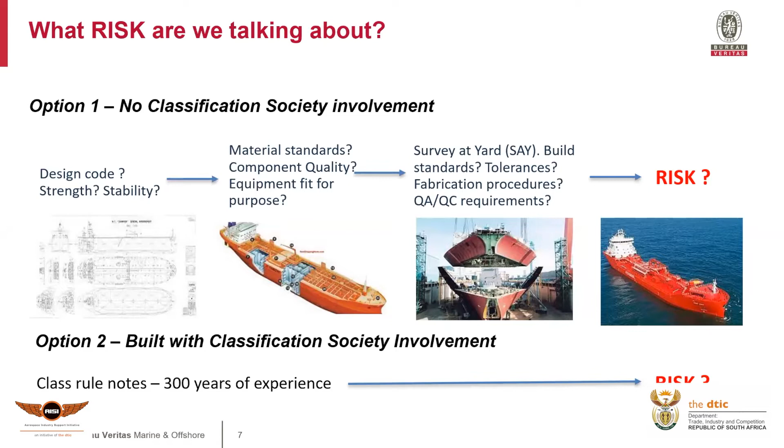So as time went by, a group of class societies got together, 12 of them, and in 1968 they formed an organization called IACS, which stands for the International Association of Classification Societies.

Together, IACS classes more than 90% of the world's shipping tonnage, so definitely the biggest body in classification.

IACS is dedicated to safe ships and clean seas, and most international administrations use IACS member rules and regulations as a basis for their fleet rules and for international statutory regulations. Because IACS is such a big technical voice in shipping, it plays an active part in suggestions and discussions with the IMO and assists with the development of international conventions.

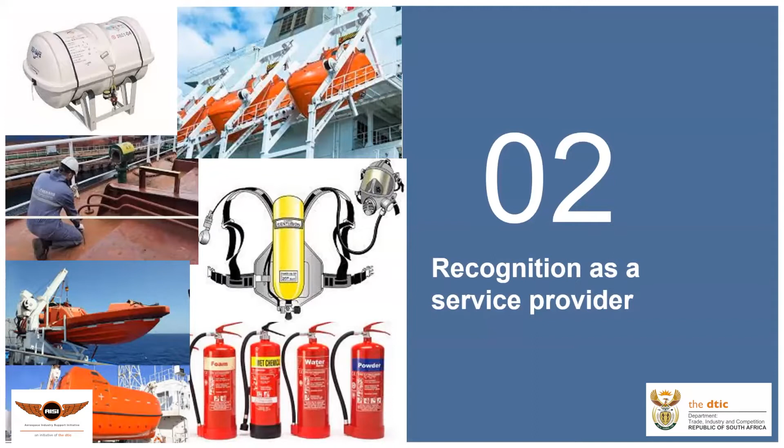Okay, moving on to recognition as a service provider. So typically there's lots of people involved with shipping.

You've got port authorities, financial institutions, class societies, flag state authorities, agents, insurance providers, the IMO, and then we also have service providers for class related services, service providers for statutory services, and OEM and product suppliers. So lots of different people involved.

For the sake of this presentation, we're interested in service providers for class, service providers for statutory services, and OEM and product suppliers.

For service providers, we provide a recognition scheme. The purpose of the scheme is to create a network of independent people available all over the world that are capable of providing specialized services.

There's been lots of discussion about this in the past. What are the benefits? One benefit is you have people specialized in a particular field, with specialized equipment and specialized procedures doing the work. They're independent from class, so the owner has a choice of who he wants to use.

It's supposed to be neutral between the owner and class, as neither one acts as the instructor, nor has a direct say about what the independent person is doing. It also provides competitive pricing models, because you've got different people competing, so you don't have price fixing - you've got free market competition. So there are lots of benefits for class and owners to use independent people for class and statutory services.

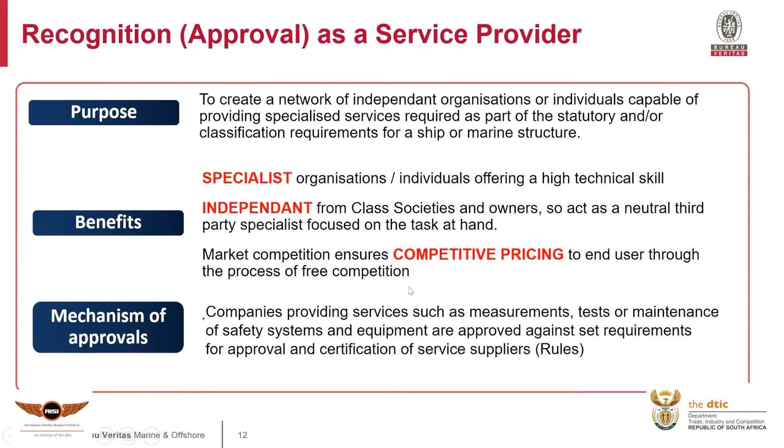How do we approve these people? Companies providing services such as measurements, tests, or other inspections are approved against a set of rule requirements. So again, we have rules coming in. Approval of service providers covers lots of different categories and lots of different services.

There are two main categories: statutory services on the left, and class and/or statutory services on the right. Statutory services tend to be related to safety items and items that deal with regulatory approvals as well.

So we have items like life jackets, life rafts, radio equipment, self-contained breathing apparatus, VDR, sound level and public address systems - mainly for passenger vessels. Same thing with low location lighting, examination of rescue boats, AIS equipment, and ballast water management systems, which is a new development based on the new ballast water convention, where we now have companies accredited to test ballast water discharge during the commissioning process.

For class, we do approval of companies that perform thickness measurements. Thickness measurement is quite an important part of classification, as it gives us an idea of the condition of the ship's shell plating and internal structure.

We do dive surveys, so we approve people for doing dive surveys. We do inspection of firefighting equipment, tightness testing of cargo hatches, noise level measurements, examination of ro-ro doors, coating inspections, gas carrier membrane inspections, and remote inspection techniques.

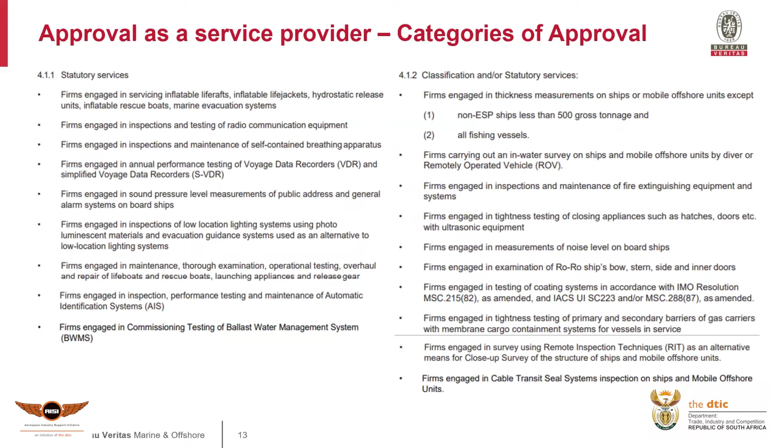So we do that internally - we check that we've got all those in place before we approach class. Once we're happy that we've got all those items in place, we approach class and make an official request for recognition as a service provider. Class will then do an initial document review - they'll check all your paperwork. Then they'll do an audit plan, transmit that to you, and we attend for an audit.

During the audit, we follow the audit triangle. We check that you've got the procedures required to do the job, that you've got the equipment required, and that you've got the people to operate the equipment and follow the procedures to get the job done. If all of those are in place, we do a practical demonstration to prove that your company can actually function, that it's not just a paper exercise. And then finally, if everything's okay, we give you approval as a recognized service provider.

Everybody's still alive out there. I haven't bored you all to death.

Still good, Mark. All good.

Okay, so as part of this internal review and assessment of capabilities, you obviously need to know a little bit of information. So where do you find this information that you need to do this internal audit, and figure out if you actually meet all the requirements?

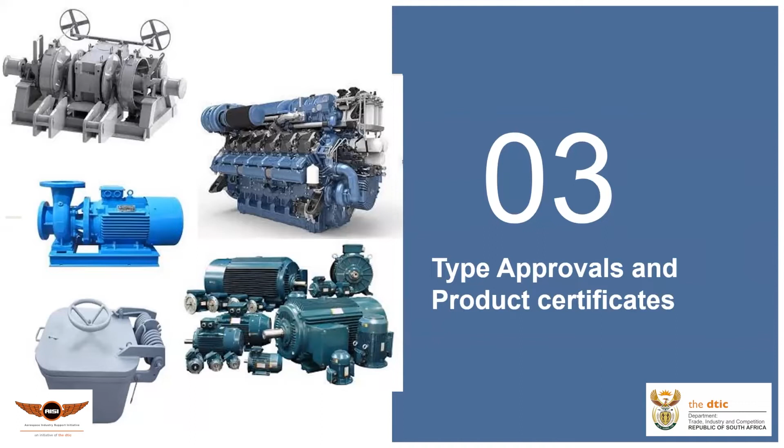So we have engines, we've got pumps, we've got hatch covers, quite a wide range of products. If you look at a typical ship, there's a lot of different products that go into it. You've got raw materials and hull components, refrigeration systems, electrical systems, propulsion systems, hull outfittings - a huge amount of material. People, I don't think, realize how many different components actually get fitted into a ship.

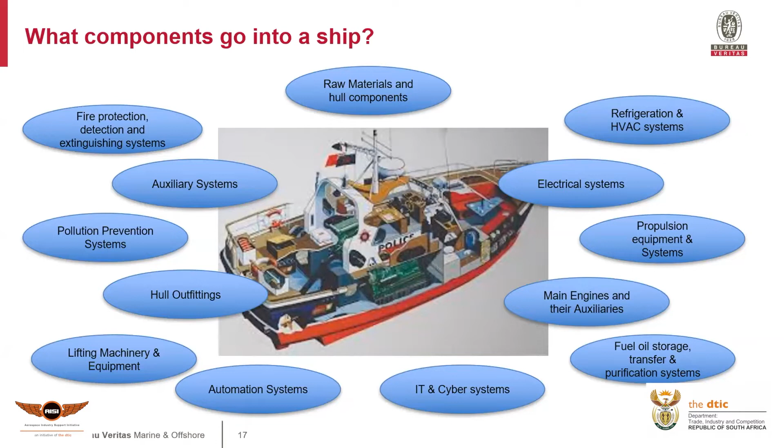And we also have our famous rule notes. If you remember, classification refers to the process of verification against a set of requirements, standards, or rules. We have many different ship types, and so we have many different rules. We've got, for example, rules for the classification of steel ships. There was a message in the chat earlier about yachts, so that would be Rule Note NR 500, which provides rules for the classification and certification of yachts. So a whole lot of different rule sets.

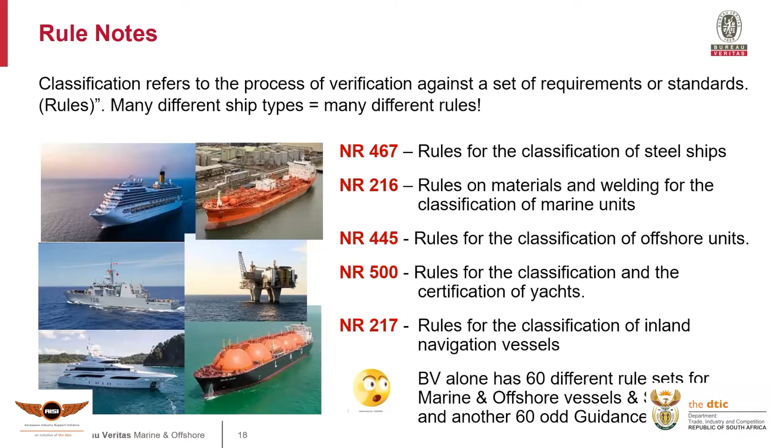We've got rules for the classification of offshore units, and BV alone has 60 different rule sets for marine and offshore vessels and structures, and another 60 odd guidance notes. So lots of paperwork - so many different components that go into the construction of a vessel or marine structure, and many different rules for many different ships, boats, and marine structures.

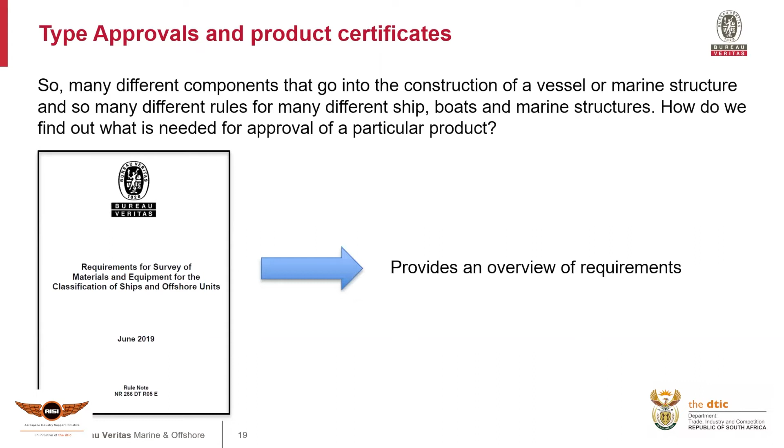How do we find out what is needed for approval of a particular product? For Bureau Veritas, we have a rule note called NR266, requirements for survey of materials and equipment for the classification of ships and offshore units. So what BV have done is provide a roadmap or simplified version of all our rule notes - everything gets put into one little book so you can read it and then get referred to the various other rule notes. It just provides an overview of general requirements for material certification.

When you open the book and read it, you'll have a lot of pages like this - we'll just run through it quickly. This is for raw materials and components for a hull. You have a description of the item, and then steps for product certification. On the right, in terms of remarks, you can see little notes that refer you to the correct rule note that you would then go and see to get detailed information.

If you look at the approval process, just a few key points on how it actually works. It'll start off with a design assessment or approval. So you would generate your design and send it off to class for review. Class will look at your design and review it against the applicable rule notes.

Same thing with material - you would choose your material, send your material selection to class, and class will then look at the material selection and review it against the applicable rule notes. If both of those meet rule requirements, the design assessment or design approval section of the approval is passed.

Then we do the second phase, which we call survey at works, which is examination of your prototype. We do physical examination and testing to check that it meets the design requirements or theoretical expected requirements. If visually and quantitatively it meets the design assessment documentation, and testing meets the testing requirements, the product is awarded a type approval certificate and/or a product certificate, depending on the category of approval.

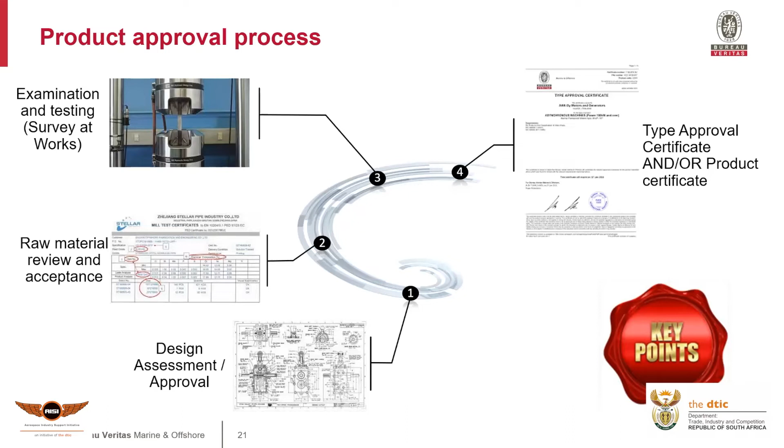We have different categories of approval at BV - there are 3 different categories, and each category has a different level of BV involvement. IBV products are products that we need to certify individually - for example, steel plating on a hull - those are done per batch produced, and we get a product certificate for those.

We have HBV products, which are mass-produced products - this example, we've used fuses. They're basically similar products produced in large volumes, needing to meet requirements, but provided the manufacturing technique is maintained, the product that comes out of the production line is going to be the same.

And then lastly, we've got DBV products, which are products like cable ties, where we have a design assessment, but we don't really get involved in the verification of the production. And you'll see that as the product risk, or the risk of the product to the vessel, reduces, so does our involvement.

A little bit more detail. Sorry, wait, just hang on, Mark. I'm trying to mute somebody, not muted. Just trying to see who's speaking. Never mind, there we go.

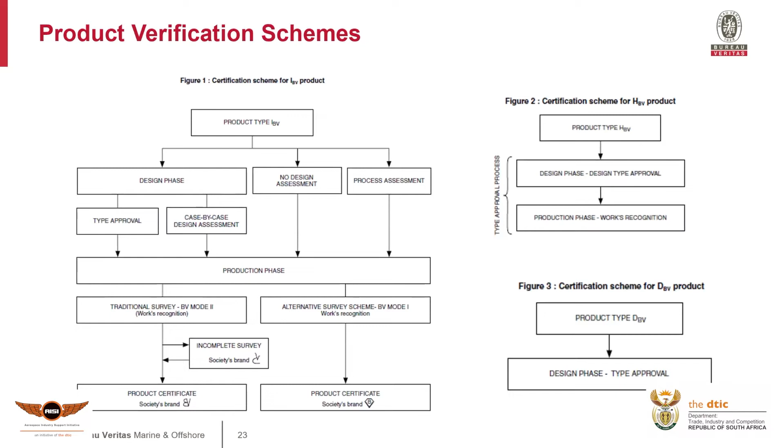So product approval. If we're going to decide that we've got a product that we want to have approved by class, how do we go about getting it approved? First step, again similar to the original discussion about service providers, is to do a review and an opportunity analysis. What opportunities are available to me? Is there a local shipyard that needs certain components? Are they importing those components? Can I make them? Can I approach them to make them locally on their behalf? Find a market.

Once you have a product and you've decided what you want to manufacture, do a rule review to assess the requirements, or what you need to actually be achieving. Then do an assessment of your capabilities, or your capability to actually achieve the standard that's required. So effectively, do you have the necessary skills, process, material to meet the rule requirement? Check and make sure before you start the whole process that you can actually achieve what you're hoping to achieve.

If your internal exercise says yes, you then approach class for product approval. First step in this is the initial review and contractual agreement. This is the first and the most important step, because it sets the tone for the rest of the approval process. It's very important at this stage.

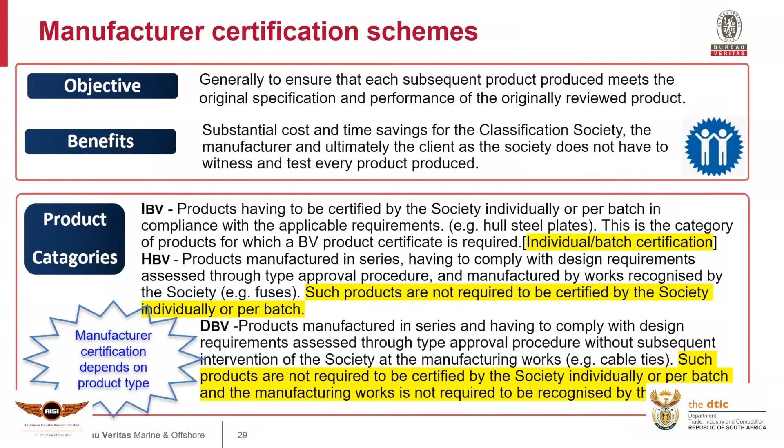This is a summary of what we just spoke about: 3 categories, IBV, HBV, DBV. Design assessment, which is the first phase, and we can call that type approval. You'll notice the second item, case by case—often people have a product manufactured as a one-off. One thing to note is that everything goes through a design assessment. You can see right down to DBV, everything is checked against the rules in terms of the design.

For production survey, for IBV we have mode 1 or mode 2. And for HBV, we have mode 2, and then DBV is not required.

So what's this mode 1, mode 2 business all about? We offer 2 different types of approvals for manufacturers. Mode 2 is works recognition, generally used for IBV or HBV products, and it's linked to a specific facility. So we review and check a specific production facility. You might have 7 different factories all making the same product, but we would have to attend each factory to have all 7 approved. If you only want to make BV products in one factory, we'd attend that one factory. So it's linked to a specific facility, and it requires an ISO 9001 aligned quality management system. So you need a management system, and it needs to be aligned to ISO 9001.

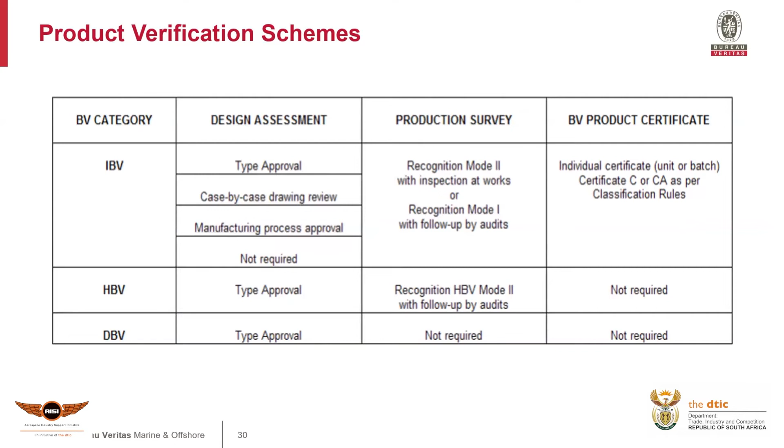Some manufacturers can apply for mode 1. If we go back one screen, we'll see under production survey for IBV, we've got recognition mode 2 with inspection at works. So although you have this mode 2 certification, we still have to attend from time to time. Or you can go for mode 1 with follow-up audits.

So IBV products can apply for mode 1 recognition, subject to agreement with BV. Again, linked to specific facilities and mandatory to have an ISO 9001 certificate.

Mode 1 is an agreed alternative survey scheme that allows the manufacturer to carry out the required tests and examinations partly or totally without the attendance of the surveyor when a society certificate is required. It's quite a mouthful, but basically, normally for IBV products, BV has to attend for every product.

If you are lucky enough to get a mode 1, the society delegates the authority to the quality management system of the manufacturer. So you can apply for mode 1, do your own testing according to the BV rule note, without BV having to be in attendance. Saves a lot of time and money.

We've got a question: what is the typical cost of type approval accreditation? It's a how-long-is-a-piece-of-string question, because it depends on the product you're trying to approve and the complexity of approval. Sorry, I can't give an accurate answer - you can have an engine that costs X and a fuse that costs Y.

The easiest thing is to send me an email. What we normally do is provide a comprehensive quote and proposal for any product you're considering having approved - we'll provide a cost, a time frame, and a set of rule requirements that will need to be met.

And from Christian - you said, do you guys work together with SANS? Who's that question directed to? Mark, let's direct it towards BV. Does BV have any direct relationship with SANS? No, we don't.

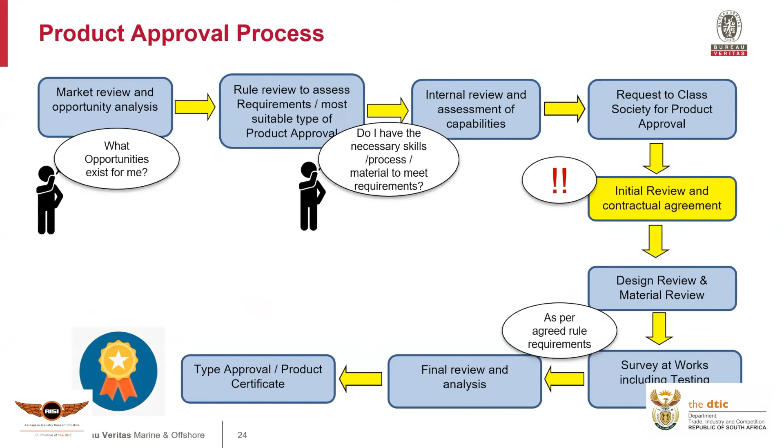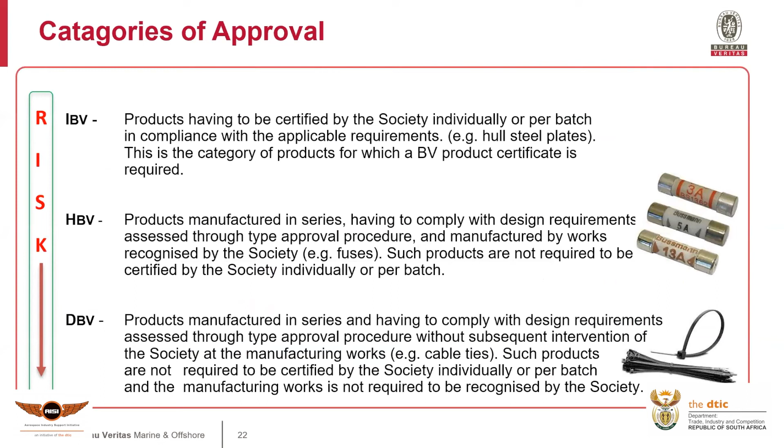Another question coming in from Admiral Watson: how much product testing can be done in South Africa? It seems there is a shortage of testing facilities. Well, this is true - Mark, I'll give over to you to give BV's perspective.

It is an issue - strange enough, we can actually test quite a lot of products in South Africa, and we are pushing to have all the type approvals we do in South Africa tested here, encouraging people to use local testing facilities.

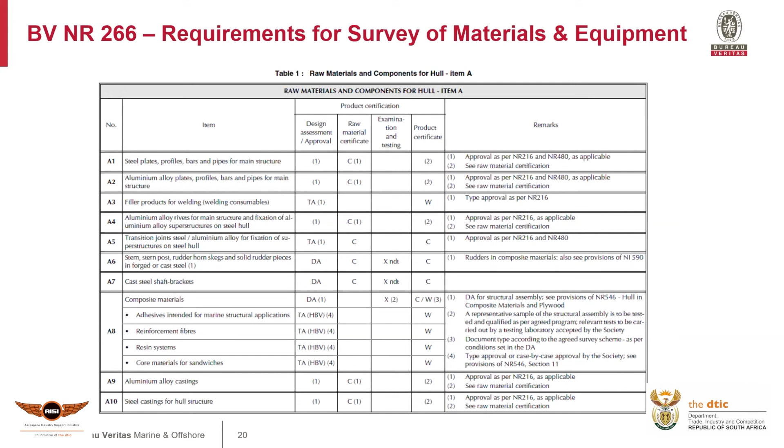We tend to be a little bit - I don't know how to explain it - we tend not to trust our own abilities, and we'll find people, even in neighboring countries like Mozambique where we did some product approvals, sending stuff all the way to Portugal and Spain when we had the facilities in South Africa able to achieve it. So there's a lot of education going on to teach people that we can actually approve products here.

One of the testing types we can't do, unfortunately, is fire rating. It's something we're looking at, which is quite a tragedy, because we have a lot of rock wool and other products that could be type approved for shipping use, but they need to be tested in specific IMO approved laboratories, and we don't have any in South Africa.

Just seeing Kevin Watson's email - if you go to the SANAS website, you can select different accredited institutions, and there's a link you can go to that details all the 17025 listed laboratories in South Africa. Thanks Mark - Kevin, does that answer your question?

Excellent. Another question from my side: how is type approval affected by different sizes, and how do companies go about it when they manufacture one size valve but want certification for a range of valves with the same design?